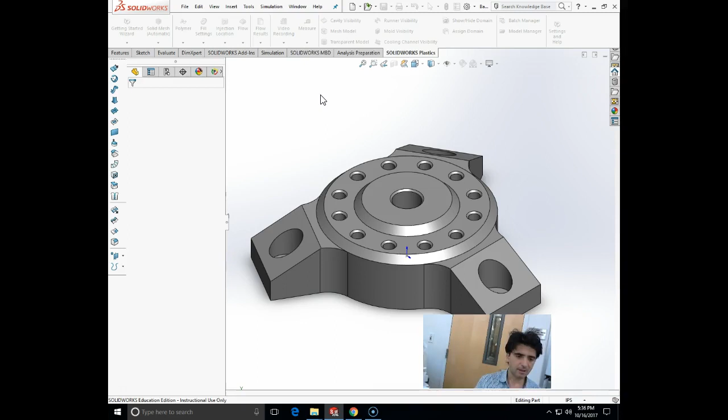Subdirectory, not base B but base, and then we are going to convert this base into the main assembly. So when I click make assembly from parts, this is the base that I'm going to use to make my robotic inspection arm. So what I'm going to do next, I will go make assembly from part.

And that will transfer in default configuration, it will transfer my base. Going to click. And here is my base.

The next step will be to readjust the center of gravity to correspond with the calculations that I want to have for the results. So according to the book, our center of gravity needs to be moved along the x-axis here, and the x-axis needs to be in line with this edge.

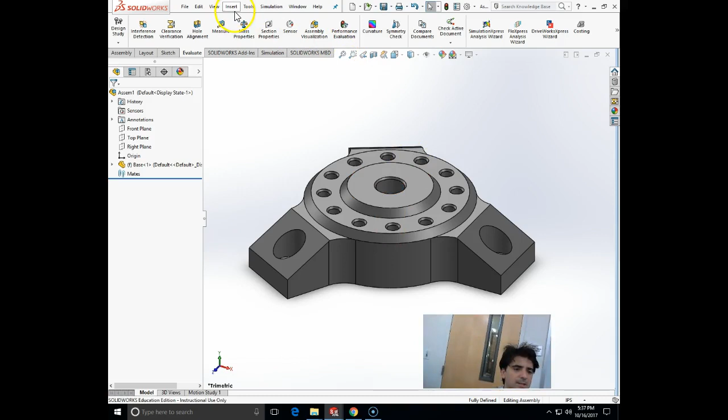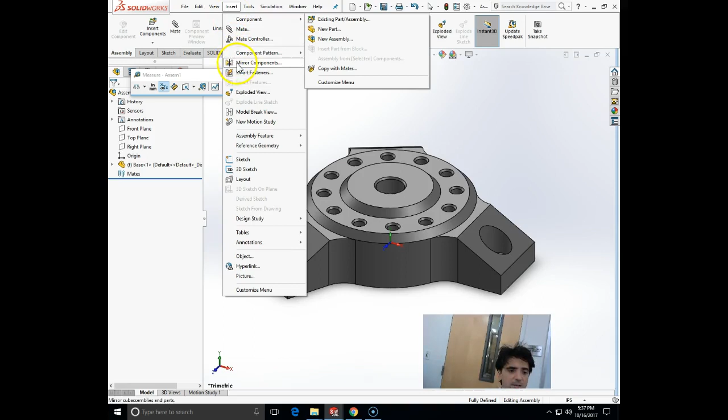So what I'm going to do, I'm going to insert reference geometry with assembly, insert reference geometry. Let's see, where is the reference geometry here, and then it will be a coordinate system.

And now I will choose this vertex, this here corner, and the x-axis is collinear with this edge, with the y-axis going this direction.

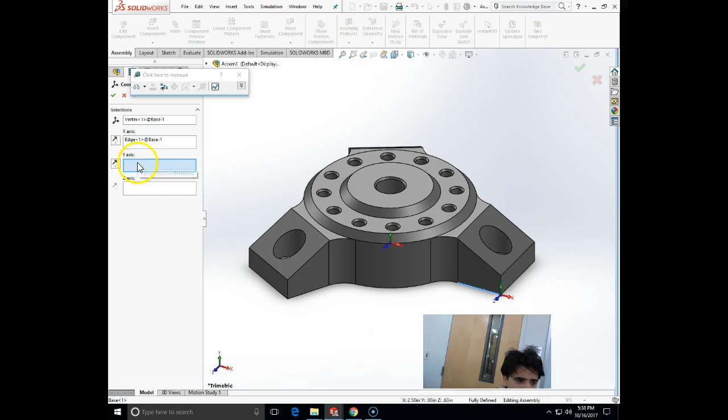So I will need to change the axis by clicking on the y on the axis block and clicking on the edge which I want to be x, and then clicking on the opposite, which I want to be y. And the z will be vertical. So that's the right orientation of my coordinate system here.

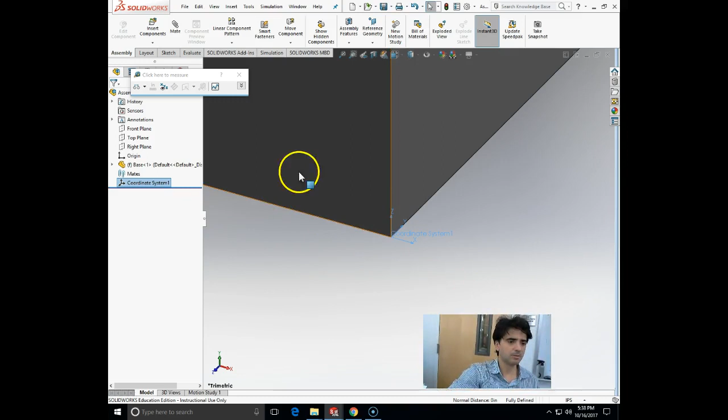So I have inserted the new coordinate system, which I will use for any further things for calculating the center of gravity, because the center of gravity answers will be used for answering your Certified SolidWorks Professional questions.

Now we are going to insert the pivot arm. So we will just insert component, I will browse it, and it's called the pivot. Going to open it. I'm going to drop it somewhere here, for example, and now I'm going to mate it.

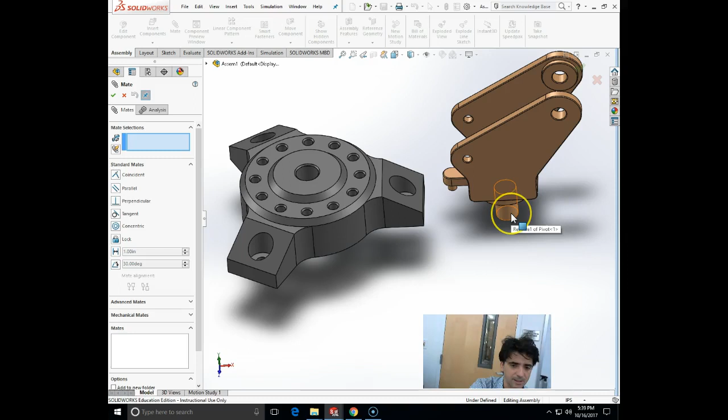I'm going to mate the cylindrical connection, the concentric, so between this cylindrical face and the inner cylindrical face. And this will be a concentric relationship.

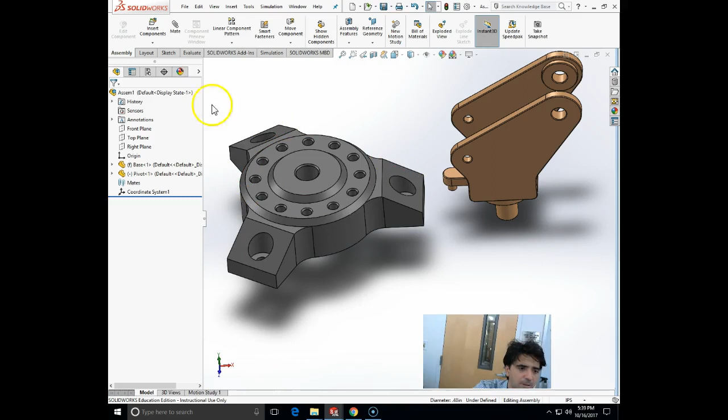Face one of the pivot, and let's see what's happening there. So we will mate the face of the base with face one of the pivot as concentric, and we will click OK.

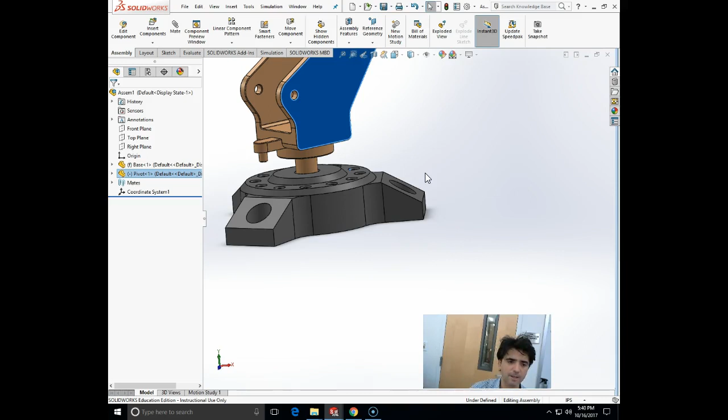And the next thing that we are going to make, we are going to make the second mate, which will be a coincident of the bottom face of the circular boss with the top face of the support. So I'm going to mate the bottom face of this circular boss.

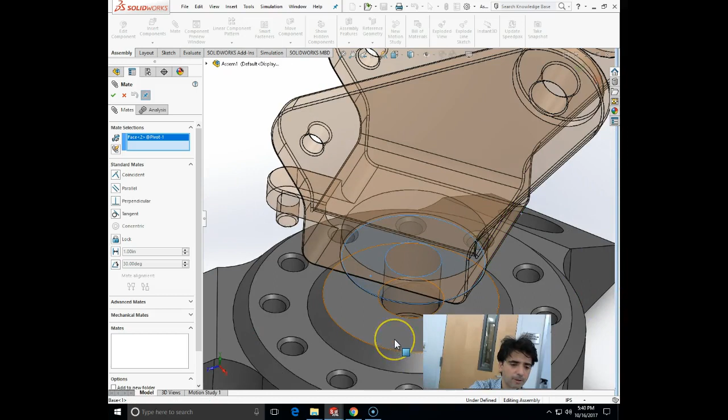The face, need to be careful here at choosing the face. That will be this face with the top face, and that mate will be a coincident.

And the third mate, I will need to open the parametric trees of both the pivot and the base.

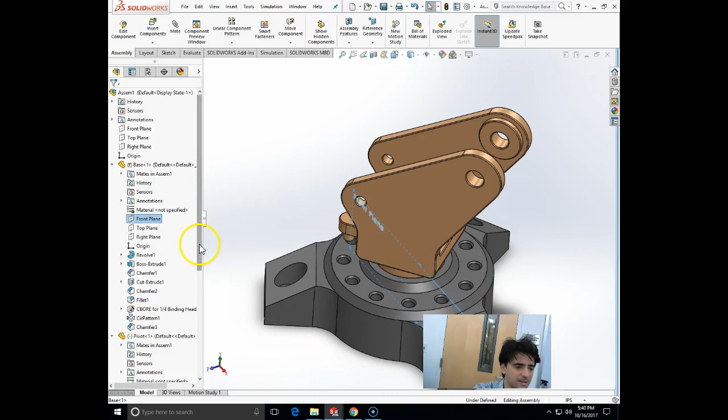And I'm going to make the two planes coincidental. So the front plane of the pivot by pressing shift and clicking the front plane, clicking the front plane of the base and front plane of the pivot. Control, front plane and front plane, by clicking front plane.

If I do the mate, as you can see, those two planes are now coplanar, which is a coincident mate. And those two components are now aligned.

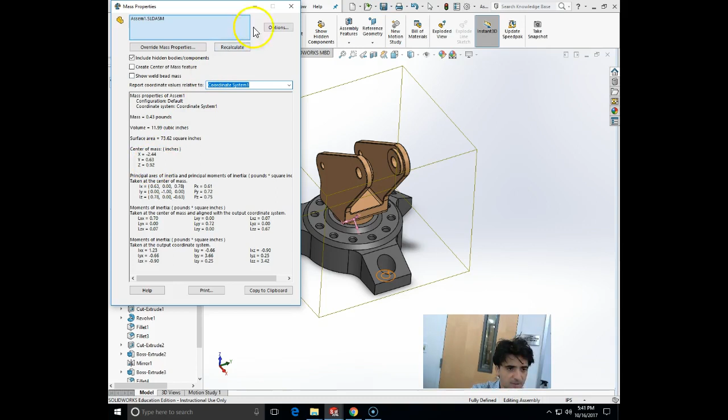Now, that will be the first question to answer, to measure the center of gravity of this object by going to Evaluate, Tools, Evaluate, Mass Properties, and in relationship to our new coordinate system, which is coordinate system 1, the center of gravity should be at x minus 2.44 inches, y at 0.63, z at 0.92. And that's the correct answer.

Now, in this you will be also asked to change the mate. Now, let's say that we want to have a different angle between our pivot front plane and the base front plane. Now they are coplanar, but let's say that we want to have an angle of 30 degrees. So how will we do that? We will do that by editing the mate.

And you will do that by expanding the mate group at the bottom of the assembly tree by clicking on the left arrow. So I expand the mate group, and that will be my coincident 2.

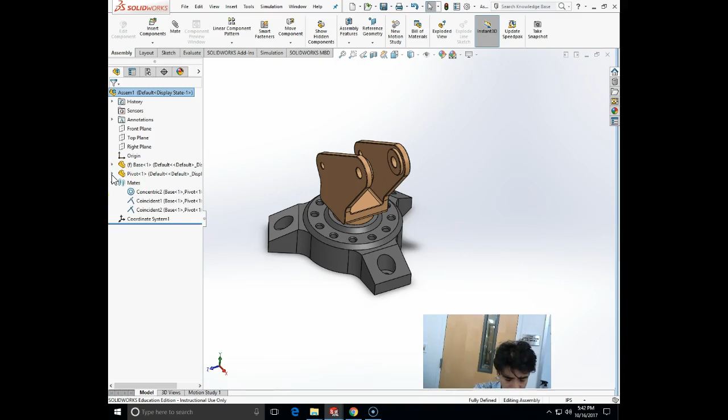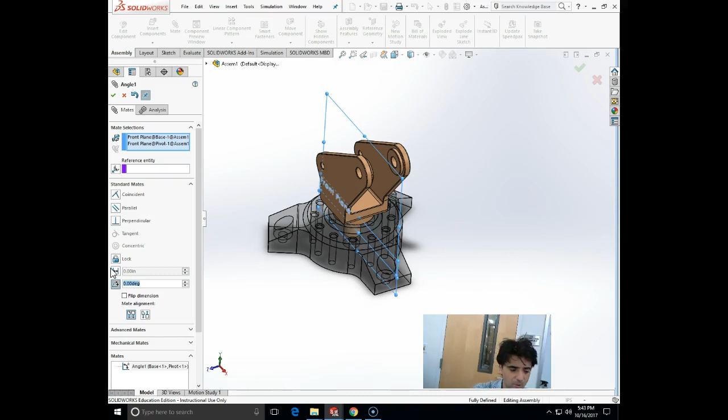And I am going to click on the coincident 2, and I'm going to right click on edit feature, and I'm going to change it here from the coincident mate to the angular mate, and I'm going to choose that the angle between those two planes is 30 degrees.

And let's see, and the orientation is correct. As you can see, as I change here the degrees, the top pivot moves, like 15. Let's go back to 30. If it moves in the opposite direction, it means that you need to flip the dimension or flip the mate alignment. Okay? So click OK.

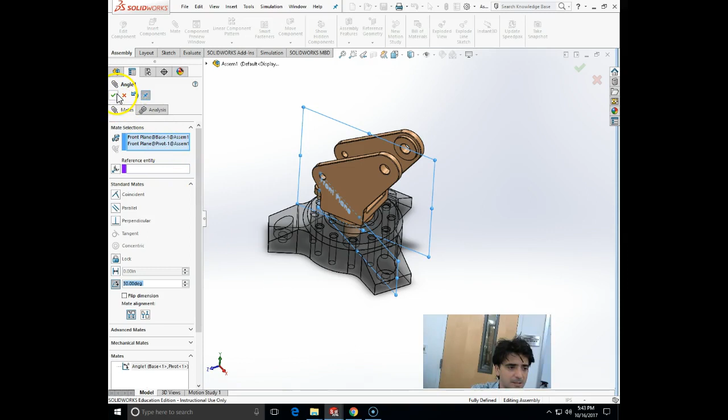And this will be probably your next question. So now let's evaluate the mass properties. As you can see, x is -2.45, y is 0.65, and z is 0.92 inches in relationship to our coordinate system 1. That is the correct answer.

Now we are going to insert other components. We are going to insert the arm, probe, piston, and piston housing, and we are going to mate them using concentric mates and width mates.

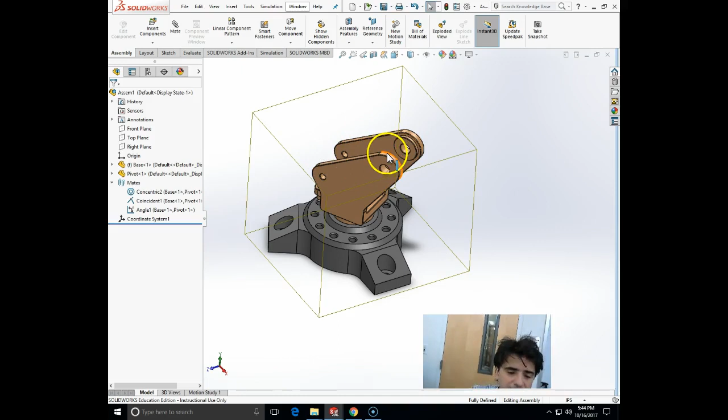So if I insert, we also need to create a sub-assembly. And when we create a sub-assembly, we will need to make the sub-assembly flexible. So let's first create the sub-assembly of the cylinder as a new assembly.

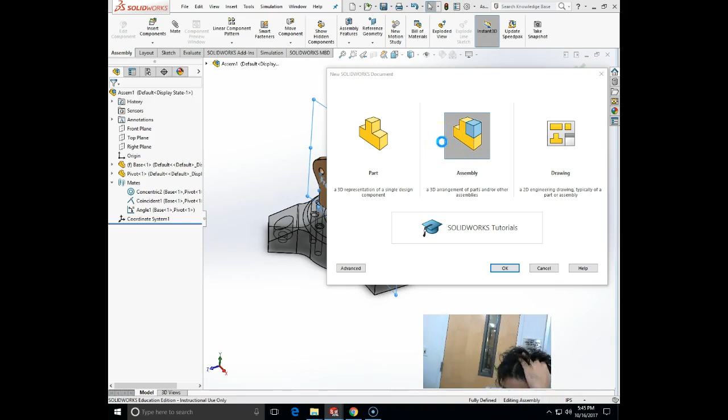I'm going to start a file, new assembly. I'm going to create a sub-assembly which I will use to insert into my main assembly. That sub-assembly will consist of the piston housing and piston files. I'm going to put piston housing as the base part.

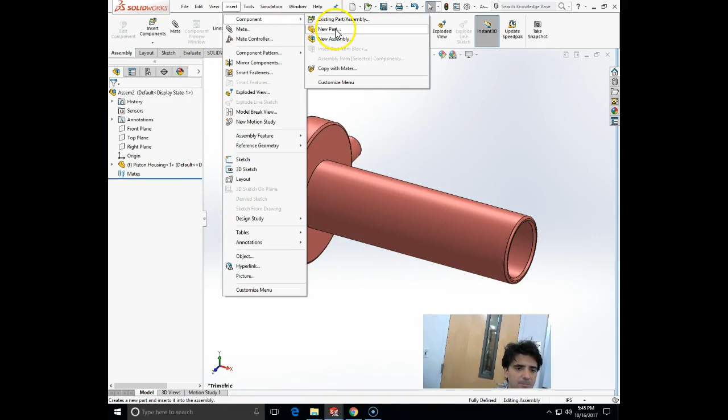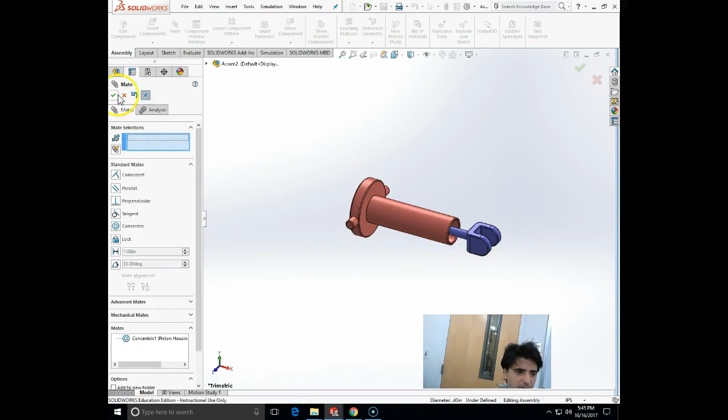I'm just going to drop it in, and I'm going to insert another part, the piston. The only mate that this sub-assembly will have is the concentric mate between the outside of the piston and the inside of the piston housing. This now allows it to go in and out.

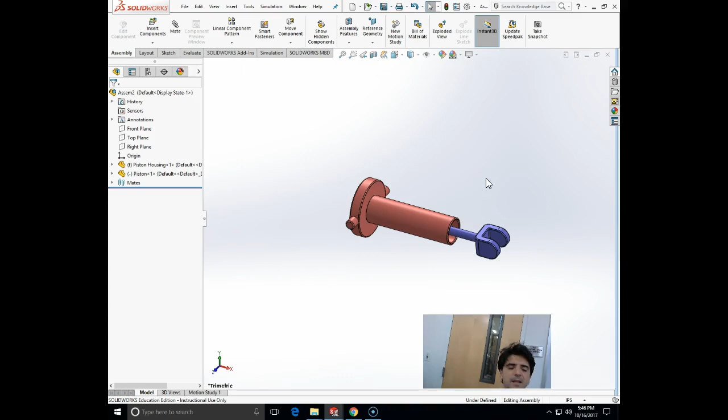We can also later on add an additional mate there. We can drive that piston by changing the distance between the end of the cylinder and the top surface of the cylinder, like we can create another mate here later on.

So we can specify, like you may be asked in SolidWorks Part III, what the center of gravity is if the cylinder is in a position in relation to its base, so if the distance between the two here is some X amount of inches.

Okay, so I will save this assembly now. I will save this as a piston assembly.

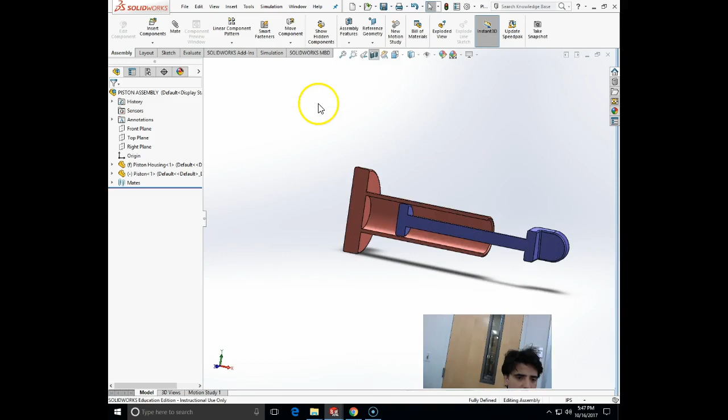Now I will go back to my assembly 1, which I'm going to save as a robot, for example, robot probe. And I'm going to start inserting components, starting by inserting my piston assembly.

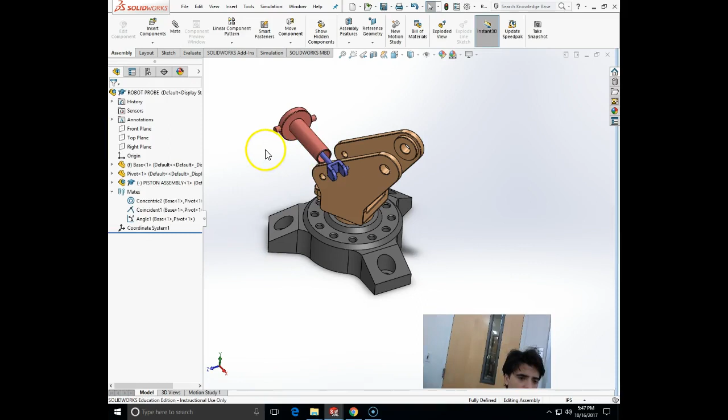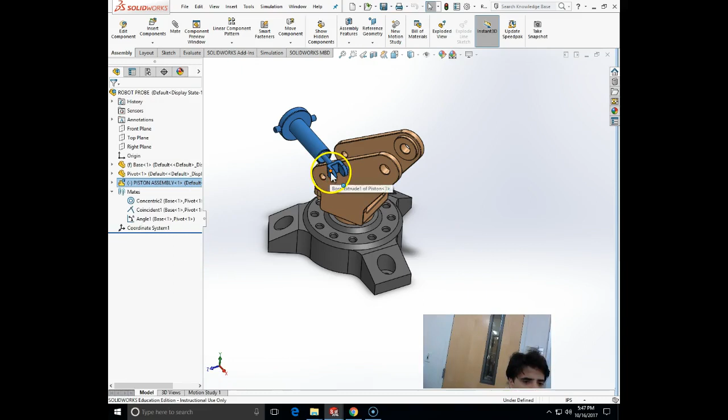I'm now going to right click on this piston assembly, and this needs to be made flexible. To make a sub-assembly flexible, use this last icon. If I click make flexible, now any mates which are not completely mated will work — you see, the assembly will now work.

Okay, so now to place this piston assembly, we need to make two mates. First, we need to make this a concentric mate. But now, how can we center this piston assembly?

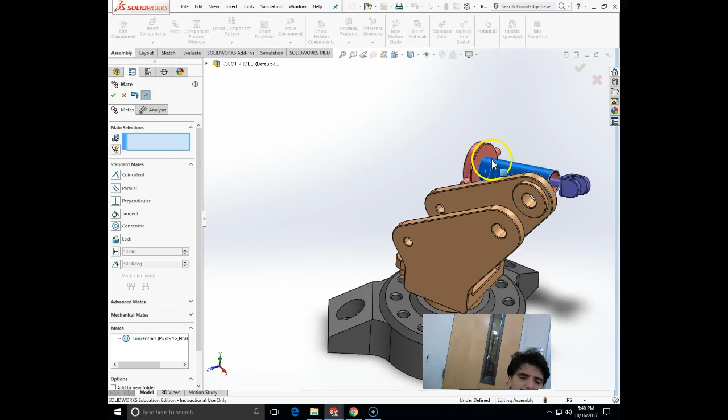Here we will use a new mate which we haven't used before, called the width mate. The width mate is used to position the object symmetrically, centered between two different objects. So the width mate is under the advanced mate pane.

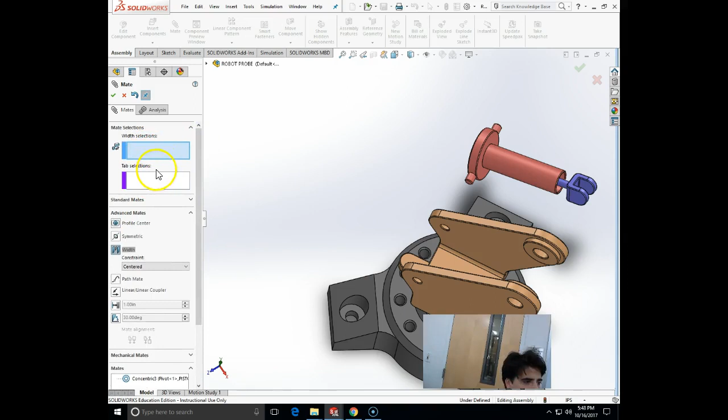So if I click on advanced mate and then click width, I need to choose the 4 parallel surfaces. I'll choose the inner surface as one set of width — the inner surface of the larger piece — then tab, and use the outer surfaces of the pins of our panel. And look what happened — it is perfectly centered.

It is perfectly now centered.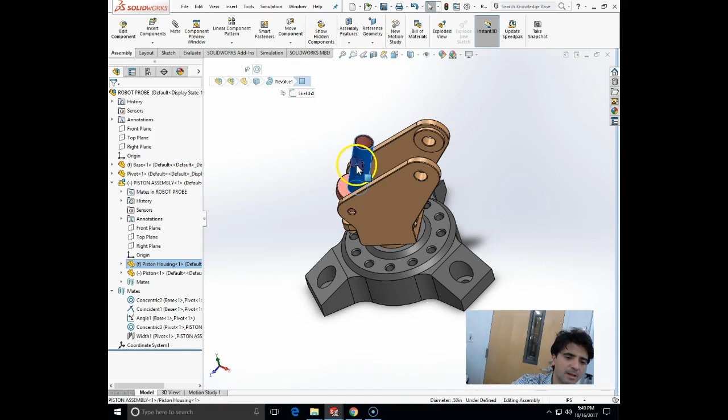Now we will continue building our piece by adding other assembly features, as per our instructional book.

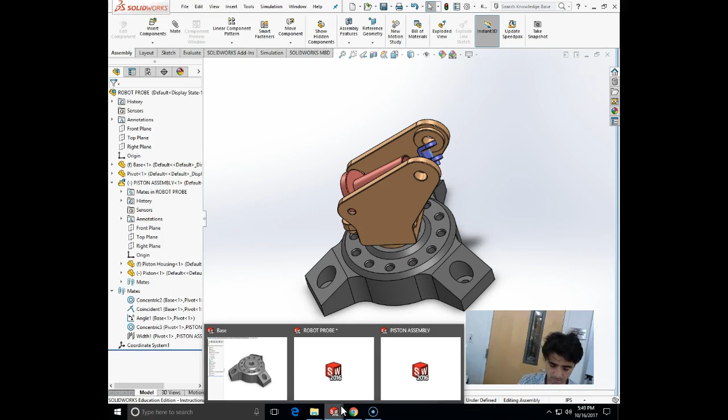Now the next one that we need to do is the arm and probe. So I'm going to insert the arm piece, and I'm going to insert at the same time the probe piece.

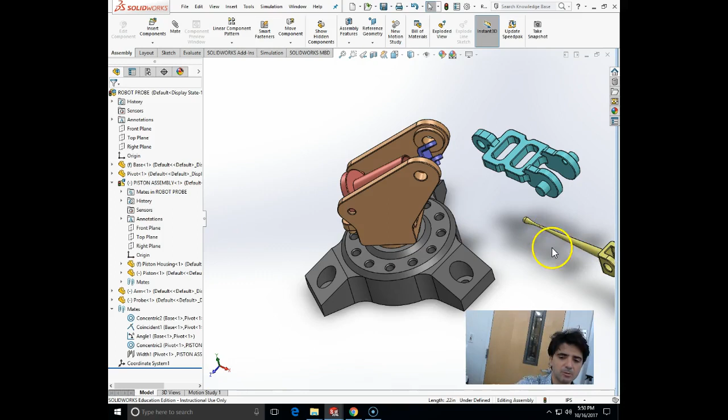Now we know that the probe goes concentric around the other end of the arm, so I'm going to choose the concentric mate with this face and with the inner face here, which will position it in the right position.

And now how are we going to center it? We just did it. So who will tell me how we will center this?

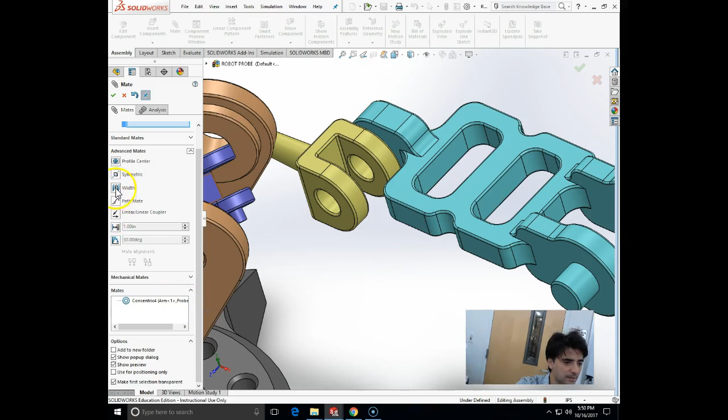Use the advanced mate, exactly, Josephine — click on the advanced mate, and then width, and then we will use the inner surface as a width, and tab to the outer faces of the other part.

Okay, now this pin, this probe, is flexible, and is positioned as it should be.

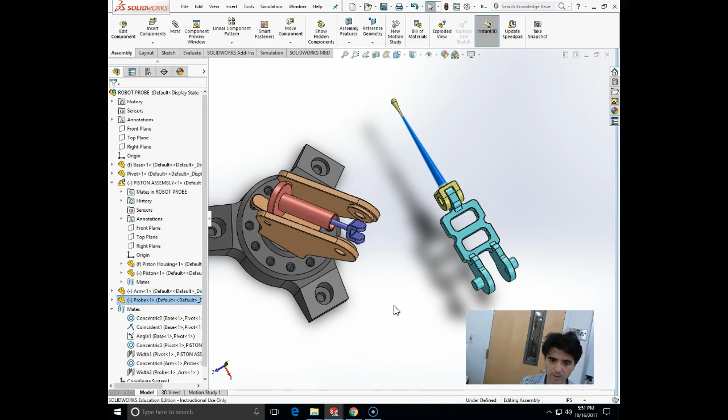Now what else we need to do? We need now to make this whole thing flexible, and one way to do this, let's see what else is missing here. Do we have another pin piece or no? This thing will be concentric with this thing here.

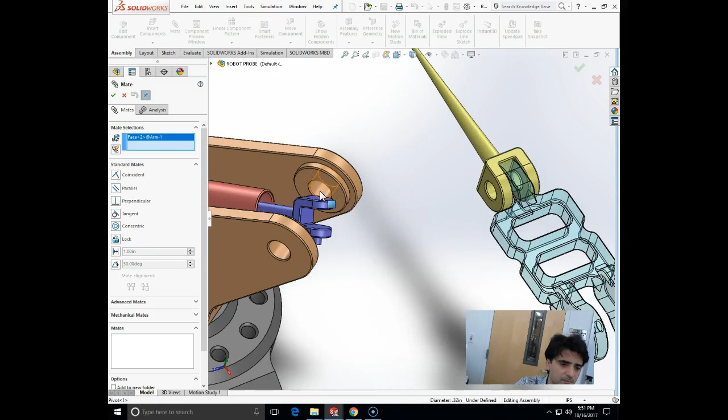So I'm going to make the concentric mate of the pin face with the face here. And if I counter align it, there it is.

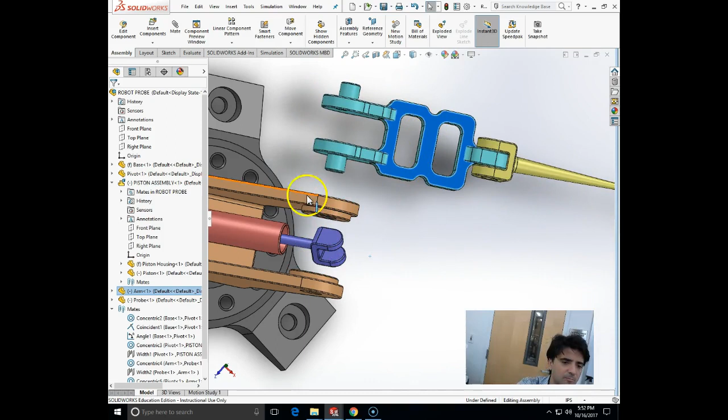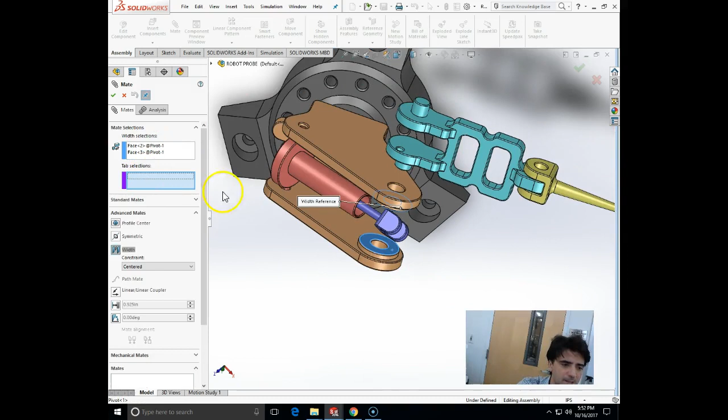And what else will I need to do here? I will need to make again a tab and width mate. To make that, it will be an advanced mate, width mate, and the tab selection this time will be the inner faces of the circular boss of the pivot for the width, and the tab faces will be the outer faces of the arm.

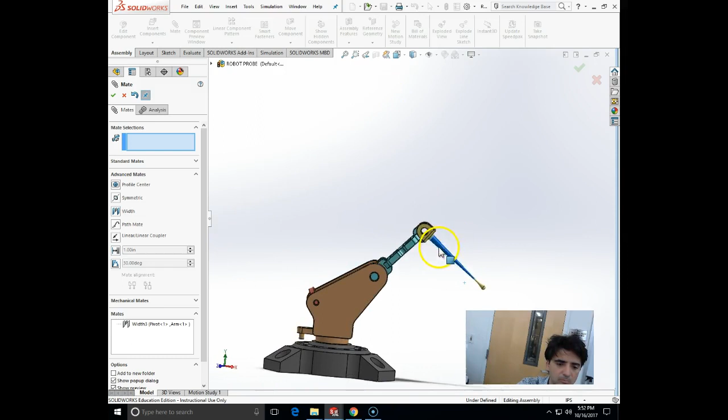And we are still not yet done, because we do have to do something with this guy here. As you can see, this is a symmetric part, so we need to look at which side it is oriented and how it is going to be concentric. If we take a look at the book, this part, which is not really described well, is oriented kind of in screen, so it's oriented there.

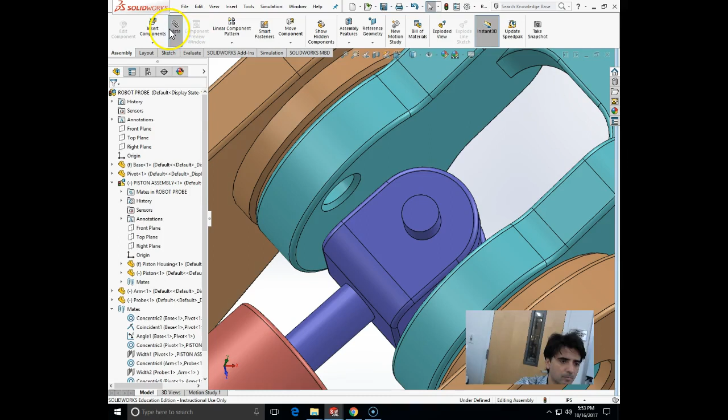So if I go to the standard mate and use concentric mate of this face and the inner face, they are concentric. Now those two are connected.

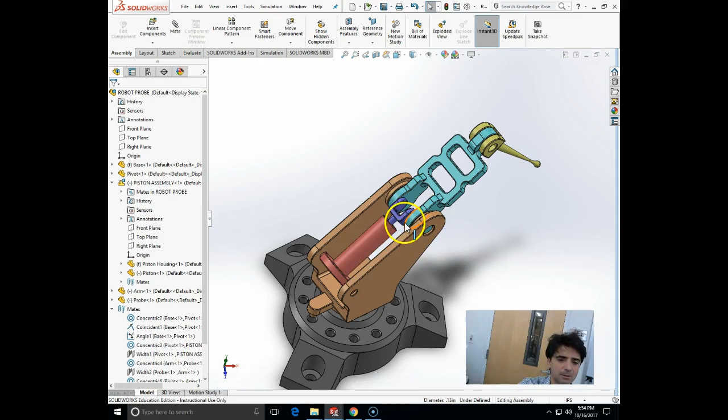This will now fully define the kinematics of this mechanism, except that this one is free to flap, but this will be what they want you to have for the exam. You see, if I pull this cylinder, as I extend it, I can completely control this angle, and vice versa by actuating the cylinder. Look, so it works like a mechanism.

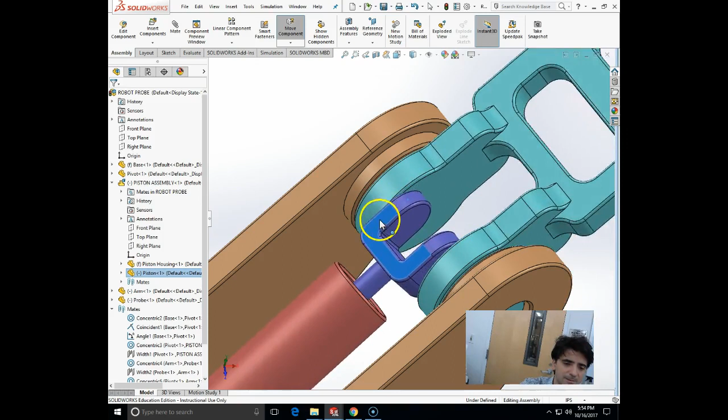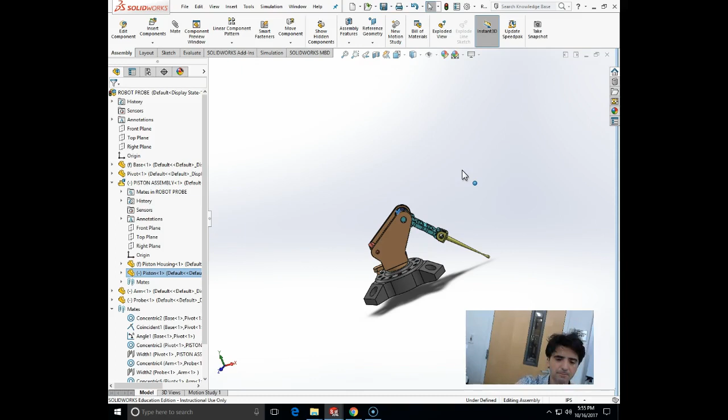Now we need to constrain this mechanism. So the current issue is that we do not have specified the angle between the arm and the probe, and we need to have this angle in order for it to work. Based on the drawing, it looks like 45 degrees.

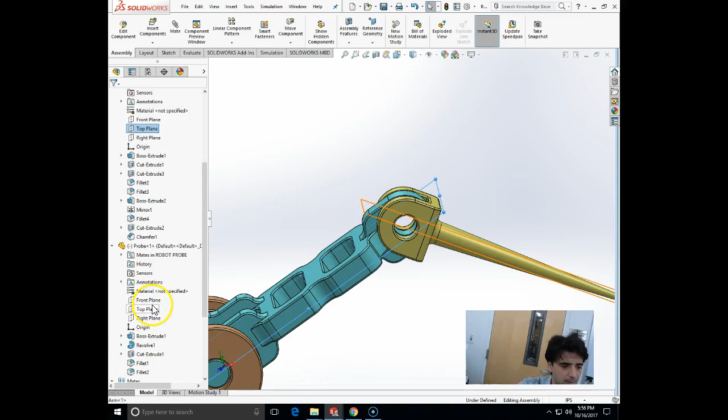So actually, we can specify that angle, and that angle will be another mate between the arm and, let's see which front, it will be between the top plane of the arm and the top plane of the probe. If I insert a mate and click on angular, let's see if I put 30 degrees, for example.

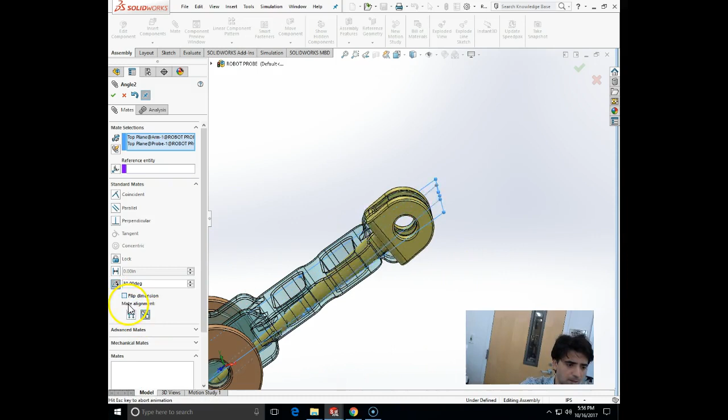And we can play with the alignment versus counter alignment. 30 degrees. Okay, here it is 30 degrees, or 45 degrees looks like more appropriate.

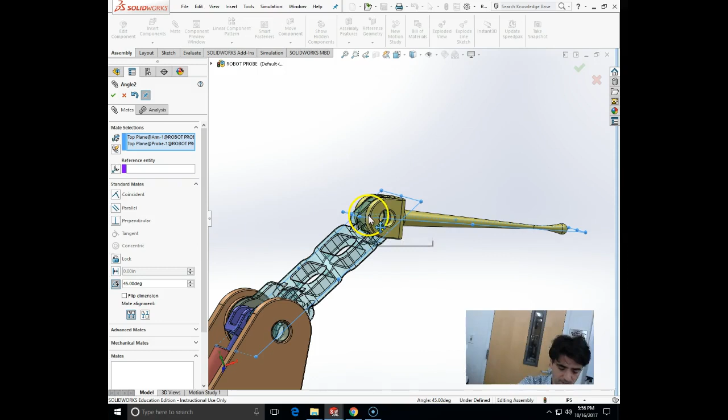And the other one is also not specified, but we can put something. In a real exam, they will all be specified so that the full assembly is constrained. This one can actually be specified not only as an angle, but usually in a real exam it will be specified by the distance made between the cylinder and the bottom of the cylinder.

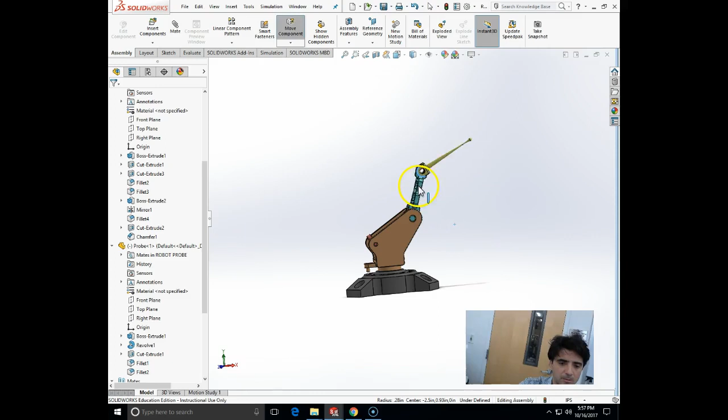Now let's do the replacement. Let's see the mechanism of the replacement of the part. To replace the base, we will replace the base part which we have here. We can close all of the parts, which is a base part.

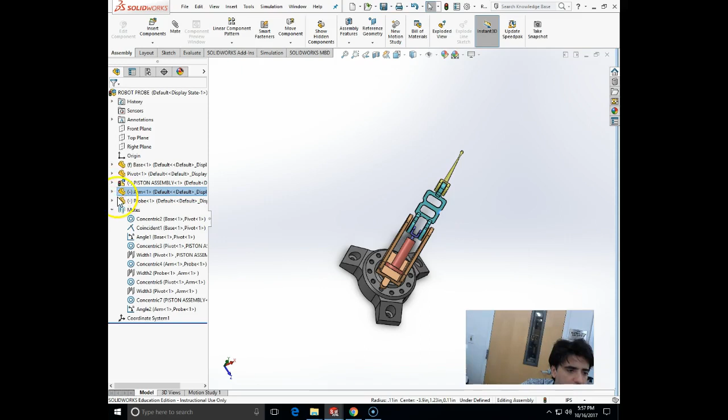We can replace the base part with a part which is called base B. Right-click on it, and now we can go to the option of replace part, which is all the way down, so we will need to scroll down. And there is a replace component option. So if I click on replace component...

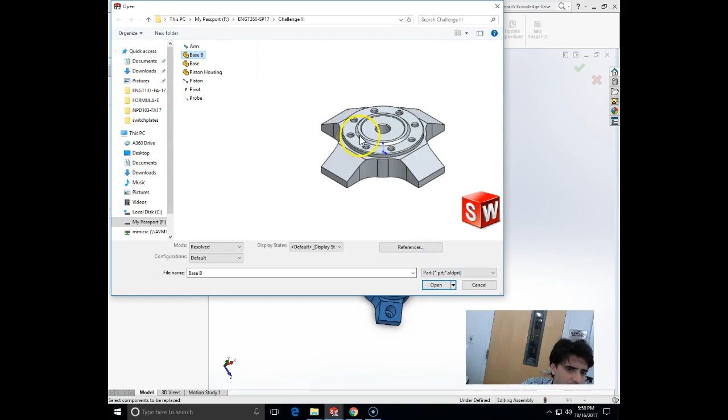Configuration match name and reattach the mates. With this one, I'm going to browse here, and the option to replace will be base B. So I will click on base B, and you see it's a thinner piece that I'm trying to replace. I will click OK, but it does not have all the features of base A, so I will click on Open. I will click OK.

And as you can see, there are some missing entities that now SolidWorks asks us to reassign or delete. There is a missing hole, but we can choose the replacement hole.

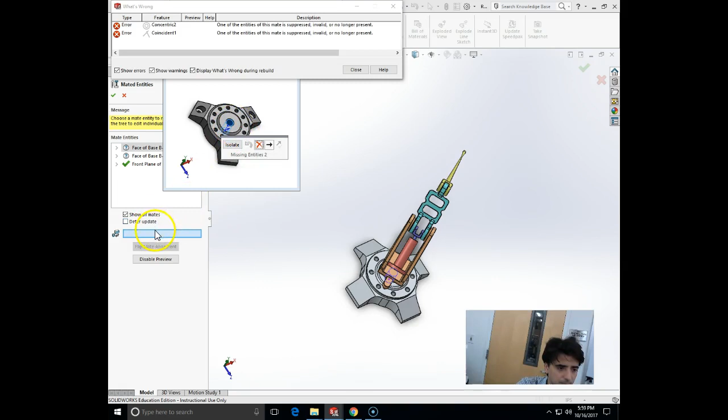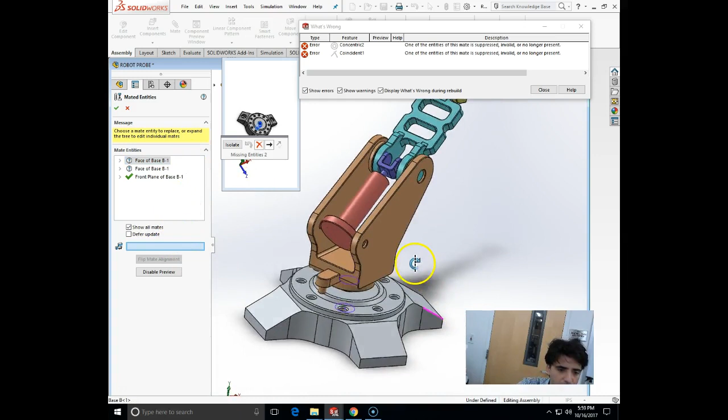Face of Base B-1. Okay, so if I choose this here, if I go and choose the face of the base as the new base hole, look what happened—because of how the hole was created, now the base is counter aligned. I can click on flip mate alignment, and here it is. And this is now accepted.

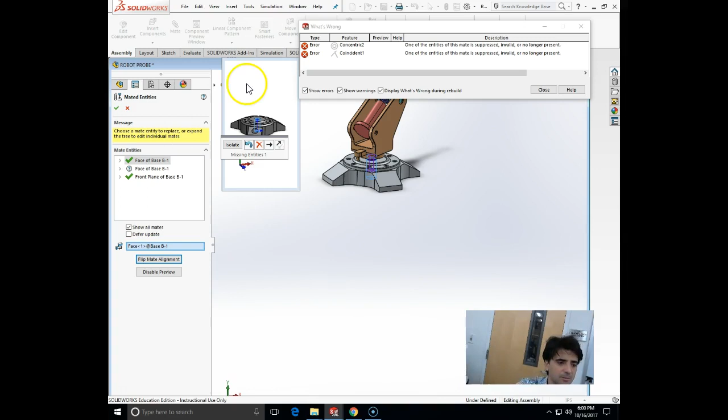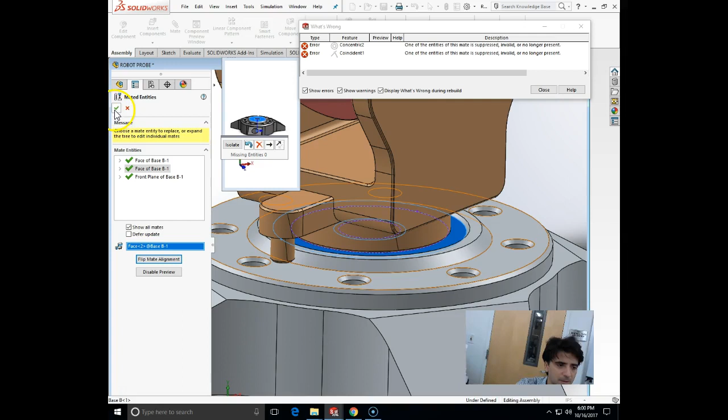And now we also have that the second piece is missing. So we will click on the next one, missing entity 2, and the top face that is missing—we don't have that second circular boss. We now have this face here, so I'm going to click on this face, and this will bring us to a geometrically correct answer. And here is your piece now fully assembled when you click OK.

Because we do not have correct information for the angles provided in the book, we can't really get the exact measurements, but we can assume that the angle is 180 degrees for the first angle. That's from the book, if I click this one to be 180 degrees.

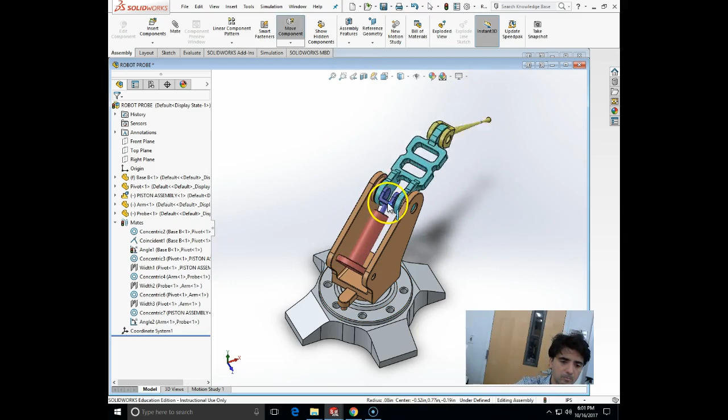We also check the mass properties, evaluate, mass properties, rebuild. With coordinate system 1, the mass property of the last question, x should be minus 0.29 and so on.

So what we can do also, we can replace the coordinate system 1. If we do it with a default, it is very close. With default, it's minus 0.21, and the correct answer is minus 0.22. Y is 1.09 versus 1.04, and Z is 0.00.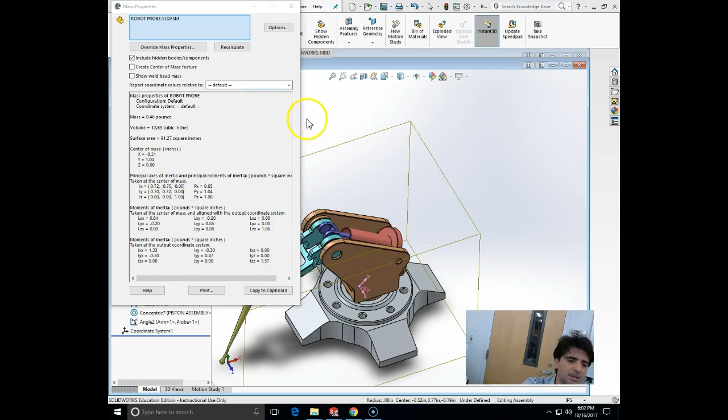So I messed up a little bit for some angles. Let's see if we can correct it fully, although we do not have the information in the book. I believe if I do a cross section, let's evaluate this distance here.

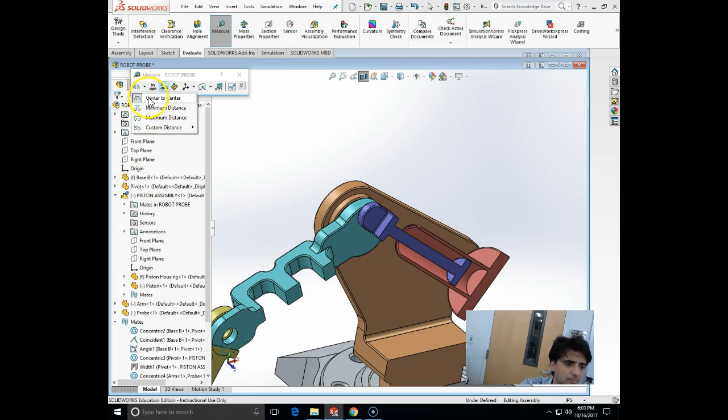From the measure, let's see what is the minimum distance between this face and this face: 0.38 inches.

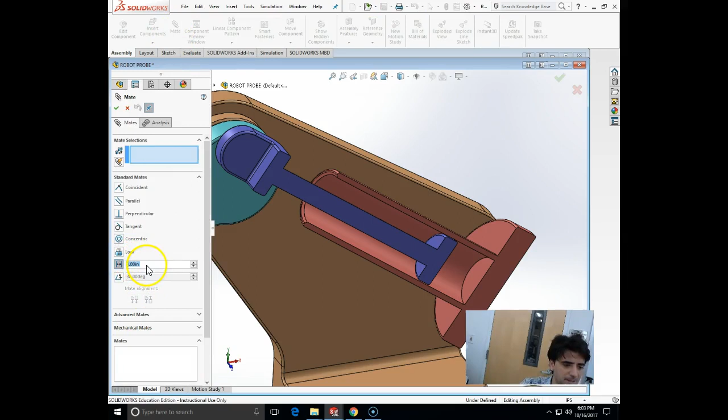How about if I put the mate inside my arm, if I put the mate here, and if I put the distance mate, and if I specify that the distance is 0.4 inch, and I choose this face versus this face.

Well, we need to figure out why it doesn't work. Because we need to be inside the piston assembly to do this.

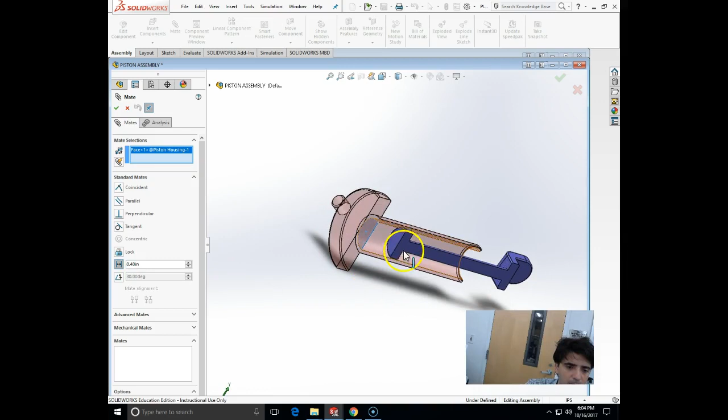So if we go back to my robot probe, I don't want that mate there, so because the piston assembly is a sub-assembly, I need to create that mate here. I'm going to put the mate here of a distance, maybe 0.4, between these two surfaces.

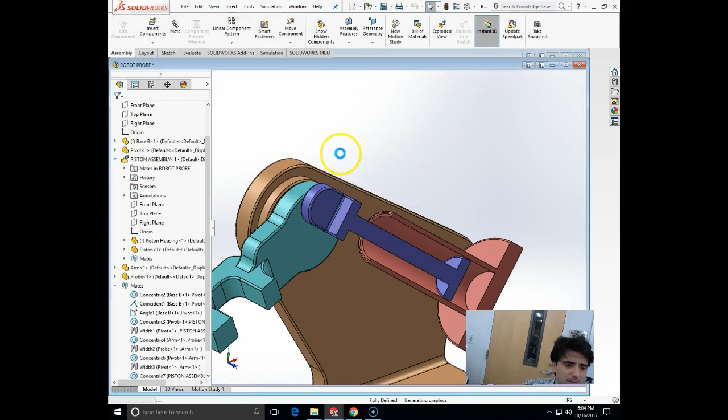Rebuild, propagate, and now we go back to my main assembly and rebuild, and here is my little bit updated model. Let's check again the evaluate, and if I measure the mass properties, let's see if I was correct.

Minus 0.21, 1.03, 0.0, and 0.00, and it should be minus 0.22 and minus 1.09 and 0.0.

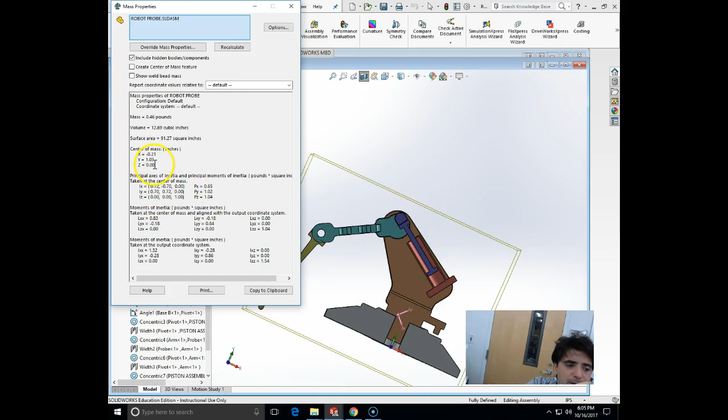So to do that, to make the other two corrections, we will need to find the exact distance. This is kind of the reverse of what will be on your exam. On your exam, everything will be specified.

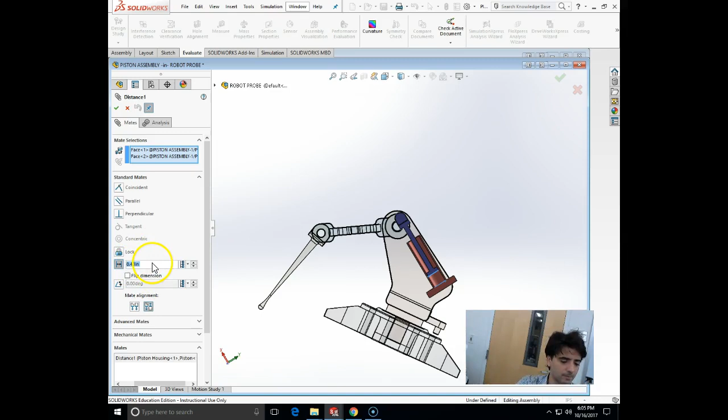But let's see, if I just edit that mate in the piston assembly again. How about if I change it to 0.5 inch? No, that will be too much. Maybe 0.25?

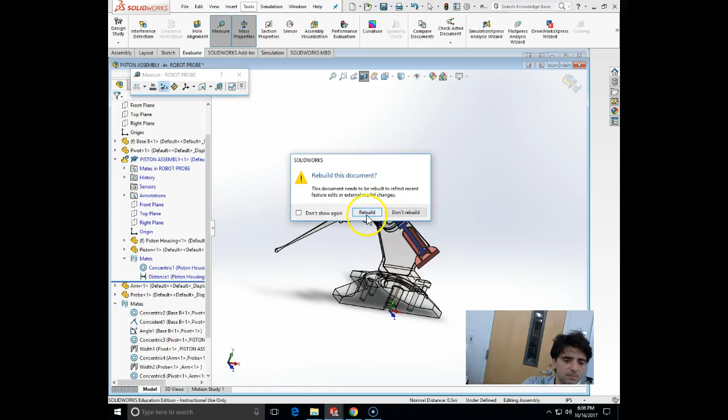That kind of looks better, at 0.25. Mass properties, rebuild. Exactly, so it was 0.25.

It was a 1/4 inch distance specification, which was missing by error from the book. As you can see, it's minus 1.02, minus 0.22, y 1.08, and z is 0.00. So essentially, we specify this distance to be 0.25, one quarter of an inch.

The assembly now comes out as in the book. Sometimes you can fix an error in the book just by doing the experiment to find what the writer intended. That's another reason why I'm not a huge fan of ClickMonkey books, but this one is actually a good Click book.

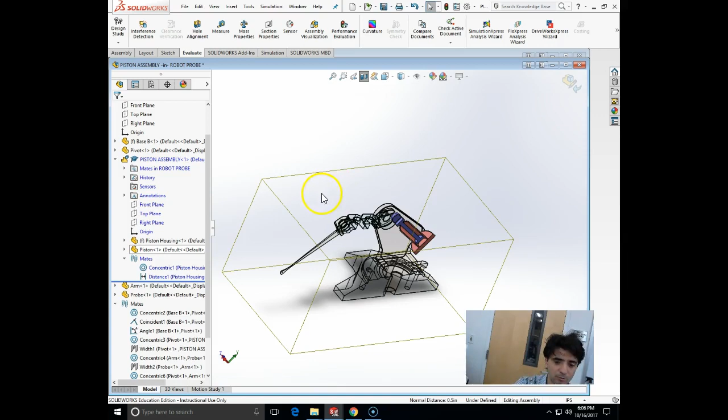Okay, so this concludes our demonstration. Essentially, your model will be very similar, and all the operations you will have to do is just assemble the parts that are given. You may or may not be asked to modify something, like drill a hole, do a simple cutout on a base, or make a simple part like a pin.

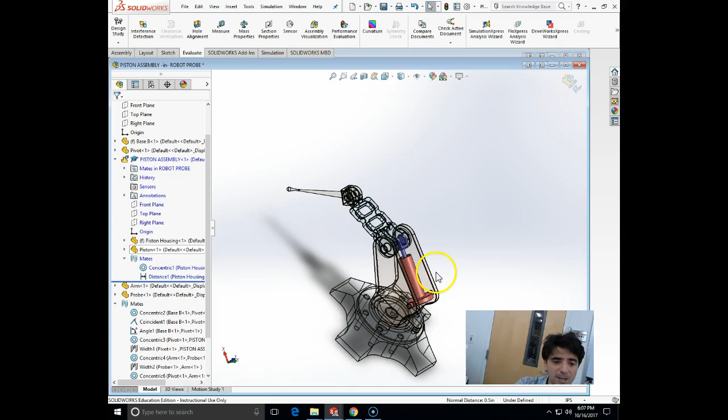What we don't have here is, we have one missing pin. In a real exam, you may be asked to make just a simple part like a pin. That will be the last of the SolidWorks exams, the Certified SolidWorks Professional Mechanical Designer exam.

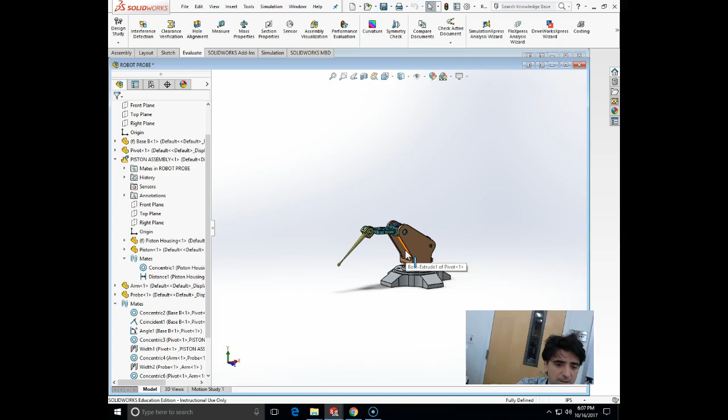So to be successful here, what we need to do is read the question carefully, choose the right coordinate system, choose the right units and the right number of decimal points, and be sure that we use flexible sub-assemblies when needed, because if the sub-assembly is not flexible, that thing will not work.

And we need to know how the width mate and the symmetry mate work. Okay, so this concludes this video.